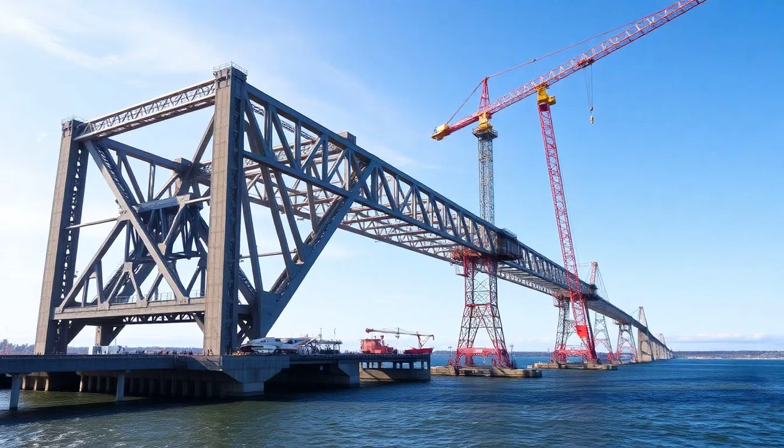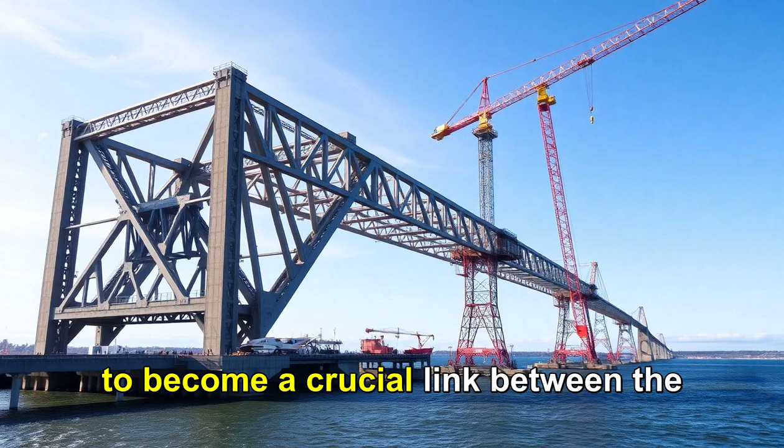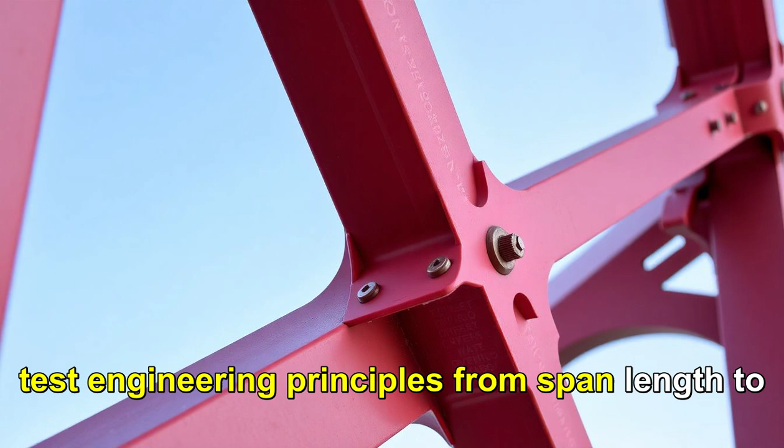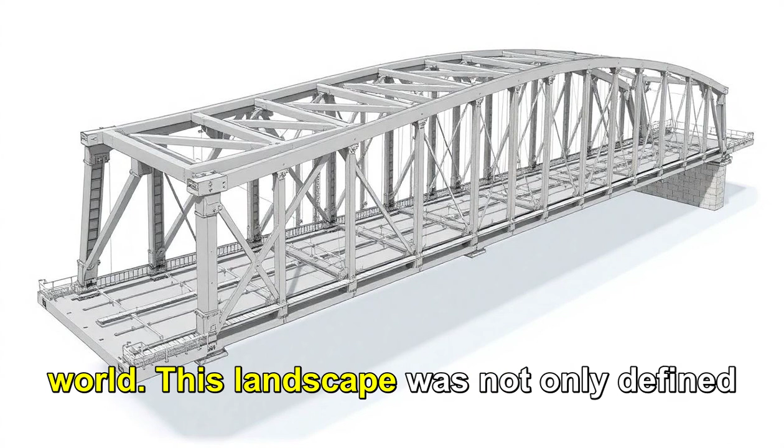Setting the scene, time and place: the St. Lawrence River is both a natural barrier and an opportunity, compelling engineers to bridge its expanse for commerce and connection. The Canadian government, recognizing the importance of a robust transportation network, chose the site for the Quebec Bridge in 1897. The envisioned nearly mile-long steel cantilever bridge would eventually become the longest in the world. This landscape was not only defined by the river, but also by the complexities of constructing such a monumental structure, driven by the need for modern rail transport. Quebec City was on the brink of transformation, with the bridge seen as a catalyst for this change.

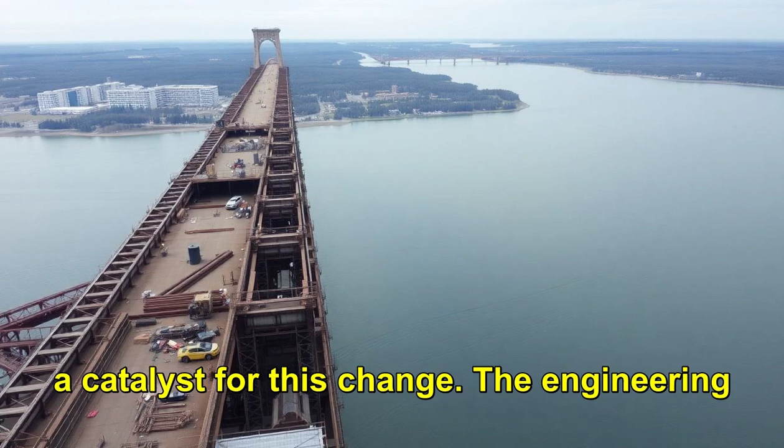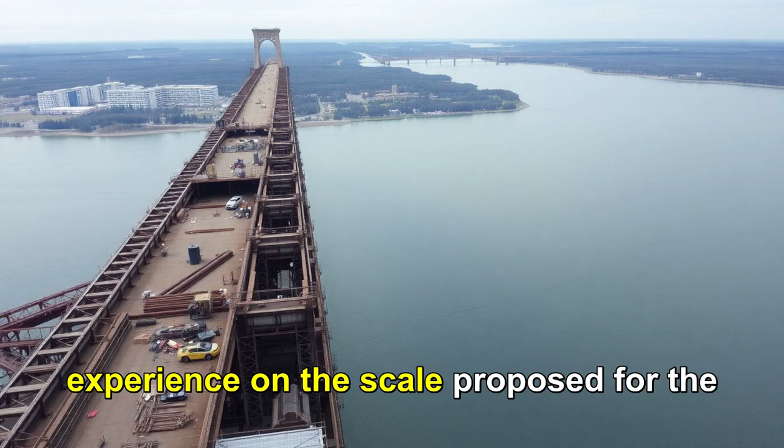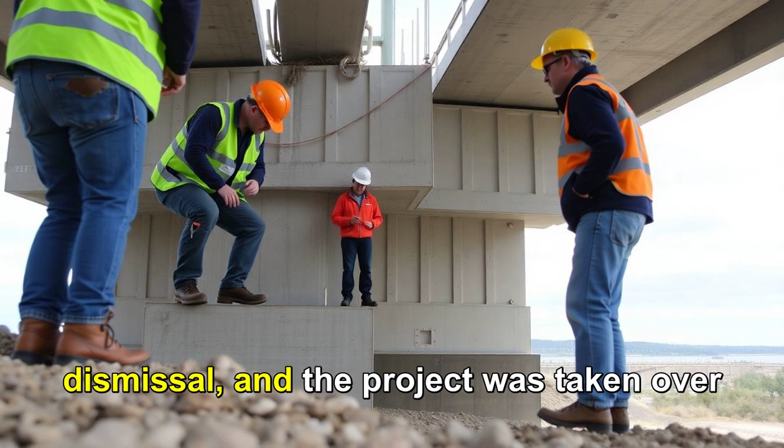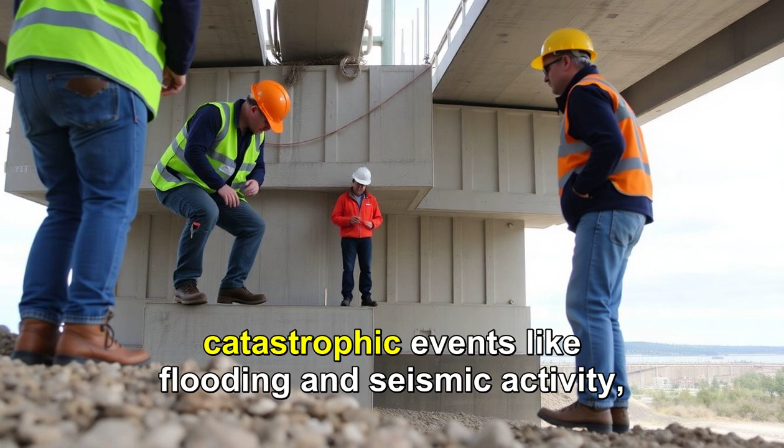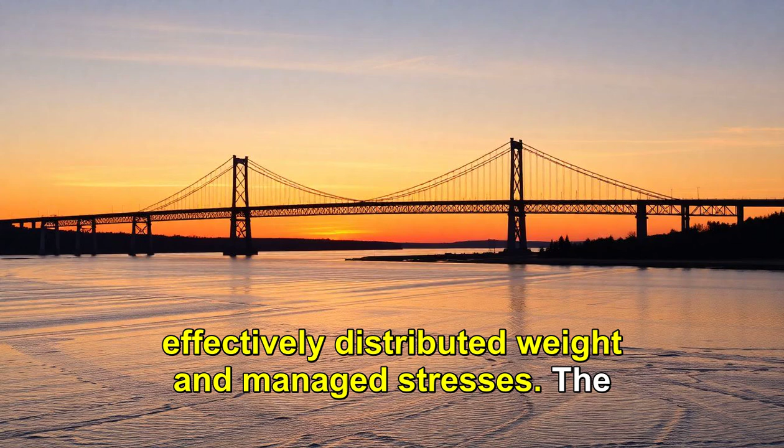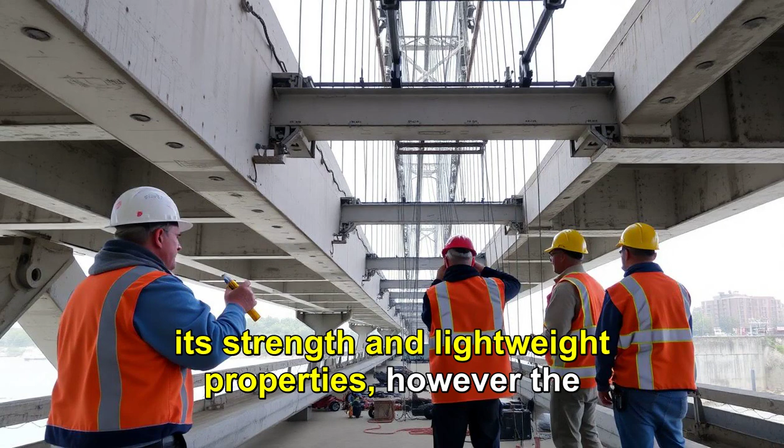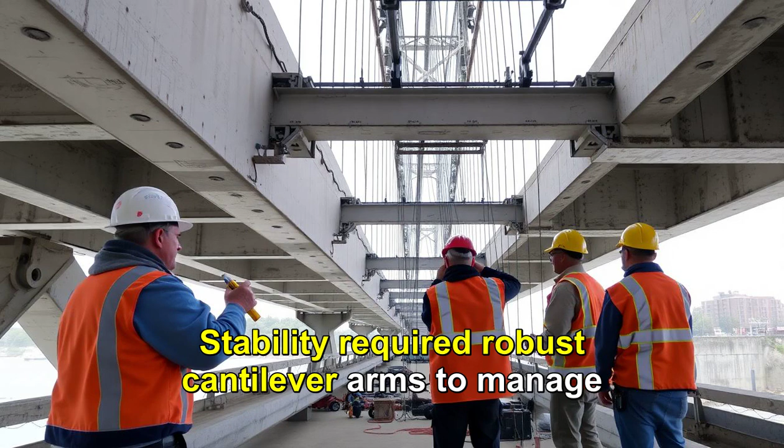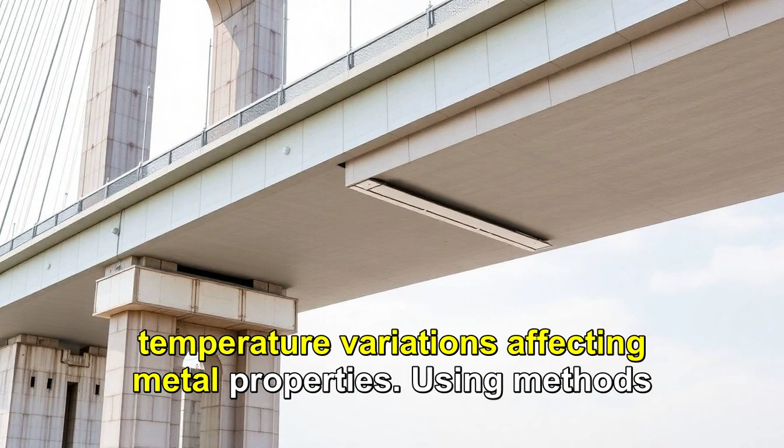Conceptual development, the solution: the engineers chose a cantilever design, allowing construction without falsework, temporary supports needed until completion. This design effectively distributed weight and managed stresses. The initial design called for a main span of 1,800 feet, 550 meters. Cooper aimed to push limits, requiring extensive calculations to ensure the bridge could support trains and withstand environmental conditions. Steel was selected for its strength and lightweight properties. However, the quality and availability of steel posed challenges. Systematic testing was required for material reliability. Stability required robust cantilever arms to manage bending and shear forces. The bridge needed a resistance system to handle wind loads, crucial due to the river's exposure and temperature variations affecting metal properties. Using methods predating modern modeling, the team relied on manual calculations and physical models to test their theories.

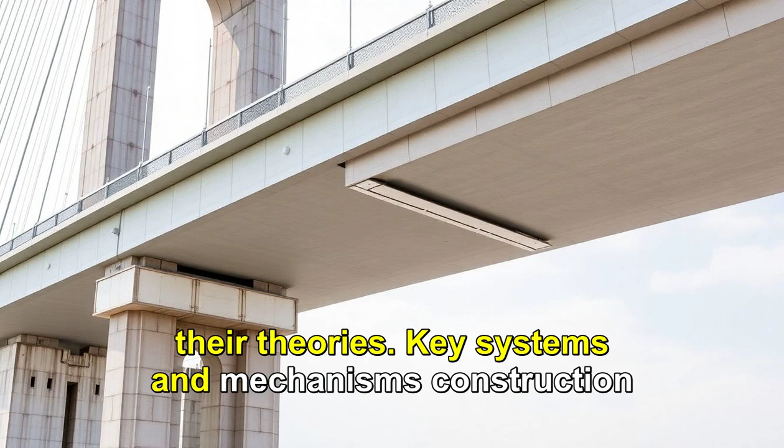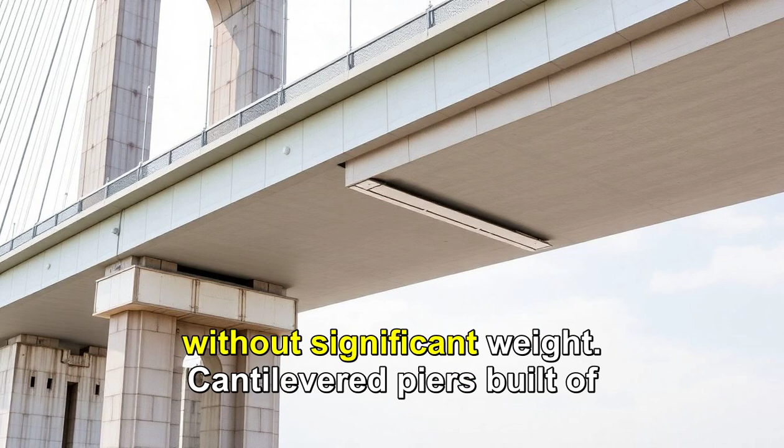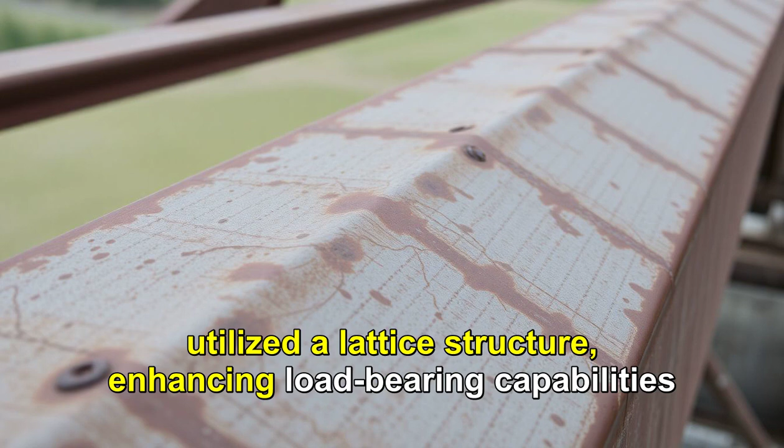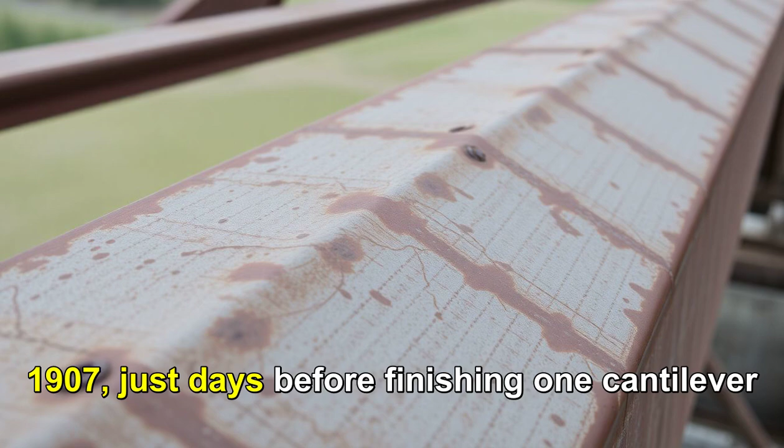Key systems and mechanisms: construction began in 1900, incorporating several innovative systems. The main structure featured a truss designed to effectively distribute loads while enhancing strength without significant weight. Cantilevered piers, built of robust masonry, anchored the cantilevers while accommodating thermal expansion and contraction. The upper deck utilized a lattice structure, enhancing load-bearing capabilities while maintaining aesthetics. However, challenges arose during construction. A catastrophic collapse on August 29, 1907, just days before finishing one cantilever section, took the lives of 75 workers, sending shockwaves through the engineering community.

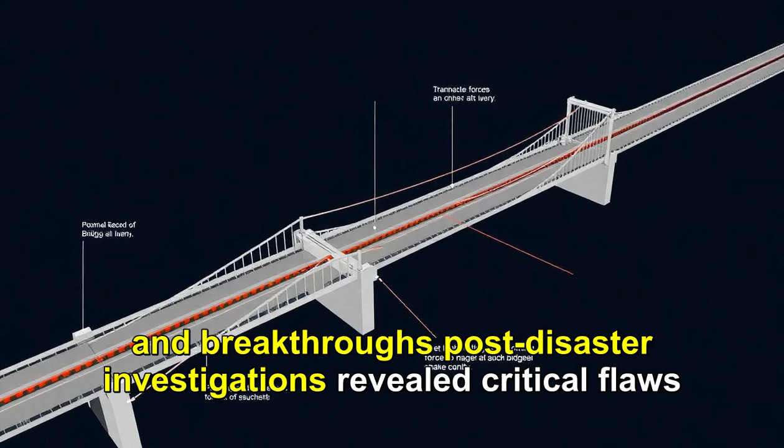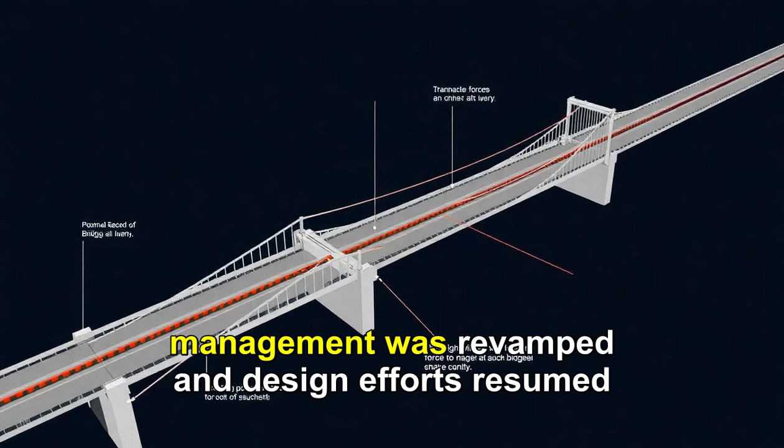Difficulties and breakthroughs: post-disaster investigations revealed critical flaws in the engineering approaches. This incident underscored a need for a comprehensive understanding of both static and dynamic forces. The project management was revamped, and design efforts resumed with a renewed focus on safety. Design modifications included additional bracing and recalibrated load distributions. A rigorous quality control approach emphasized the reliability of steel components. The setbacks spurred innovation in construction techniques and led to a new paradigm of safety and accountability in the industry.

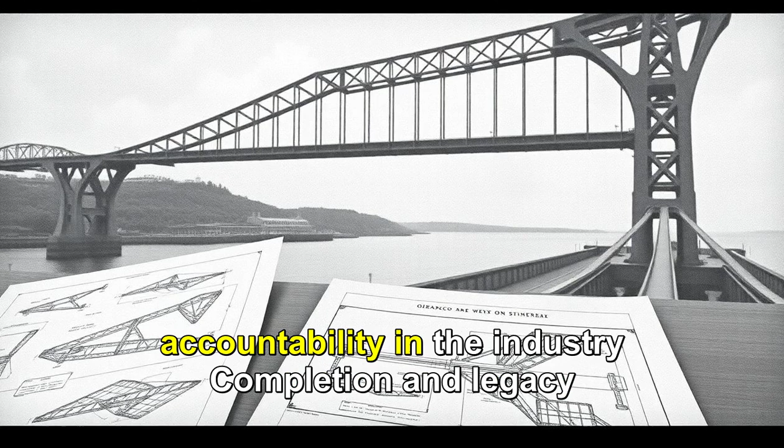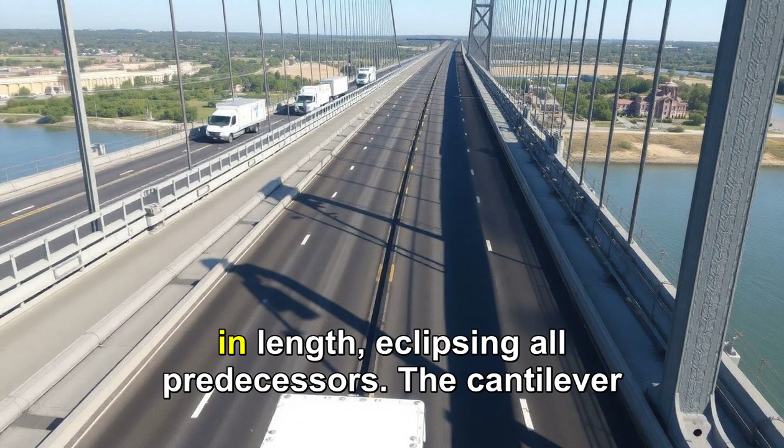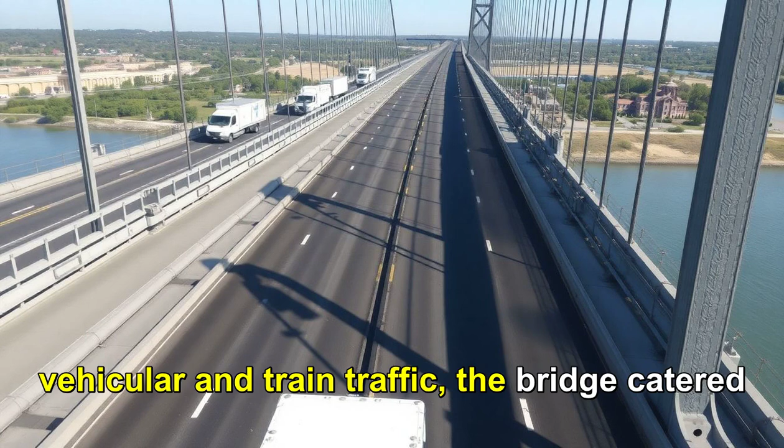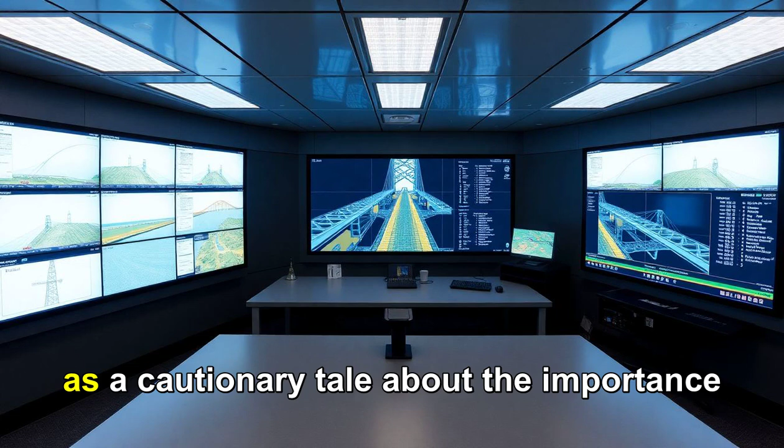Real-world impact and significance: the influence of the Quebec Bridge extends beyond its physical form. Its design lessons impacted engineering principles worldwide, illuminating the relationship between design rigor and material properties. It serves as a cautionary tale about the importance of safety, shaping legislation and protocols governing structural integrity today. The narrative of the Quebec Bridge is one of human endeavor, celebrating innovation while acknowledging the nature of failure. It remains a vital reminder of the complexities in engineering undertaken to realize ambitious visions.

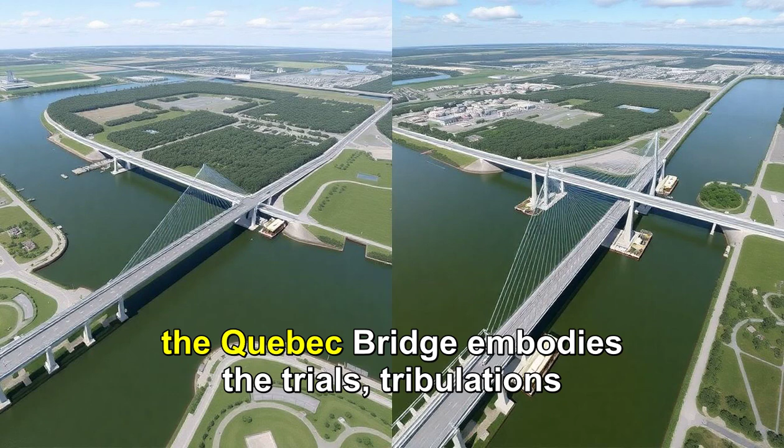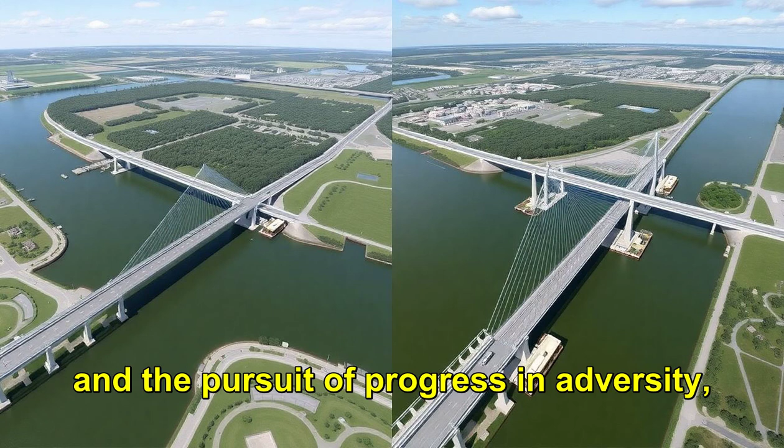In conclusion, the journey of the Quebec Bridge embodies the trials, tribulations, and triumphs of engineering. It signifies a reliable connection across both physical and historical divides. Today, as it continues to function, it reminds us of resilience, adaptive design, and the pursuit of progress in adversity, guiding future generations of engineers in their relentless innovation quest.